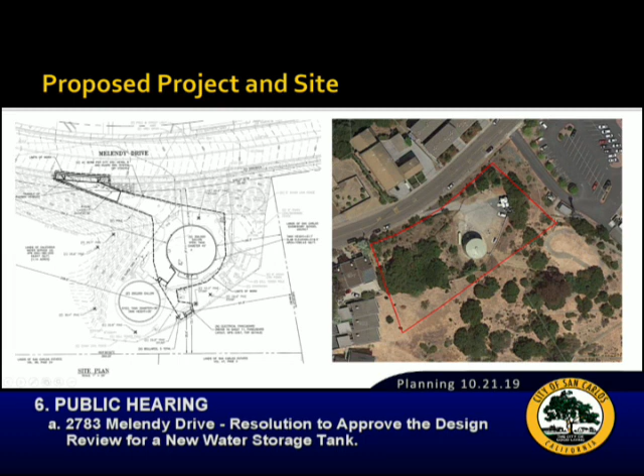They've prepared new visual simulations that reflect the revisions, and they've prepared additional visual simulations that reflect what the landscaping would look like at full maturity, which is about 25 years. The previous depicted a maximum of 12 years.

They've also upgraded the materials of the entry gate from chain link to a wrought iron gate. And lastly, the city's environmental consultant also prepared an addendum to the IS/MND to analyze the changes to the landscaping plan.

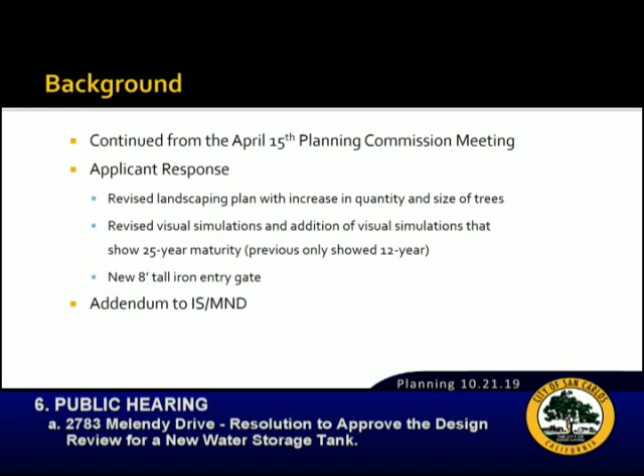This table compares the previous landscaping to the current proposal. As you can see, there's an increase of 7 shrubs and an increase of 9 trees located here and here. They've also noted that all of the proposed cedars have been increased in size from 15-gallon to 24-inch box size, so at their starting point, they'll be larger than what was previously proposed.

Next, I'm going to show the original visual simulations at 12-year landscape maturity, followed by the revised visual simulations at both 12 and 25 years maturity.

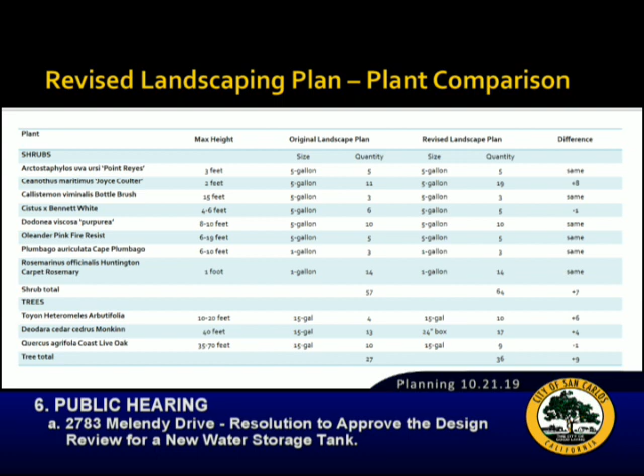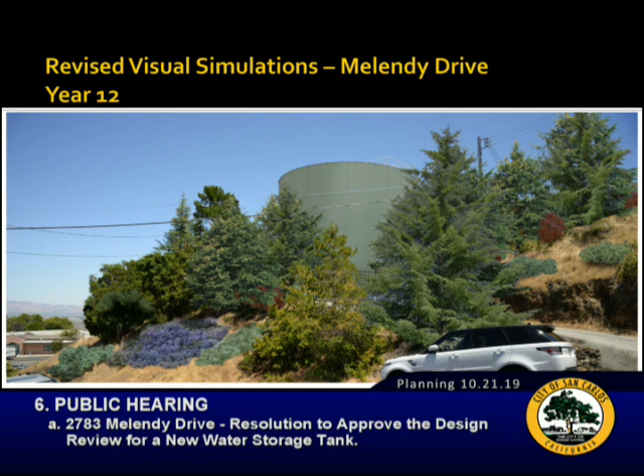This is the original visual simulation from Melendy Drive, shown at 12 years maturity. And here's the revised visual simulation. You can see the larger cedar trees are more effectively screening the tank, and you can also see a glimpse of that iron entry gate. At year 25, further screening leaves just a sliver of the tank visible.

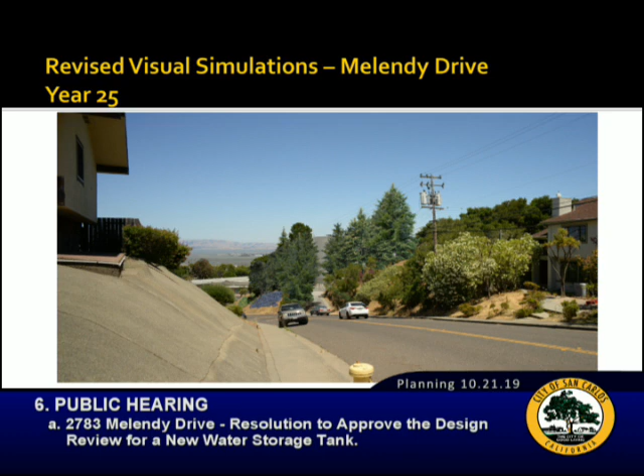This is the original visual simulation, taken further west on Melendy Drive, looking east towards the proposed tank, also at 12 years maturity. Here you see the revised landscaping at 12 years maturity, with taller cedar trees helping screen the tank. At 25 years, just a sliver of the tank is visible from the public right-of-way.

I'll summarize the environmental review process quickly. The city prepared an IS/MND and an addendum pursuant to CEQA. The project meets CEQA's mandatory findings of significance as summarized in the staff report. The addendum found that aesthetic impacts have been reduced by the revised landscaping plan, as you've seen in the previous slides.

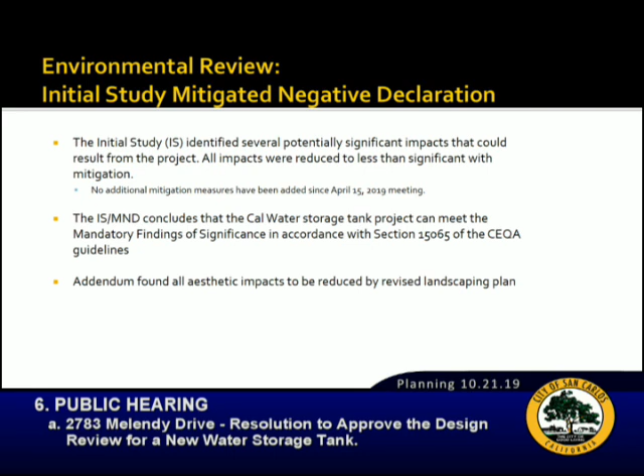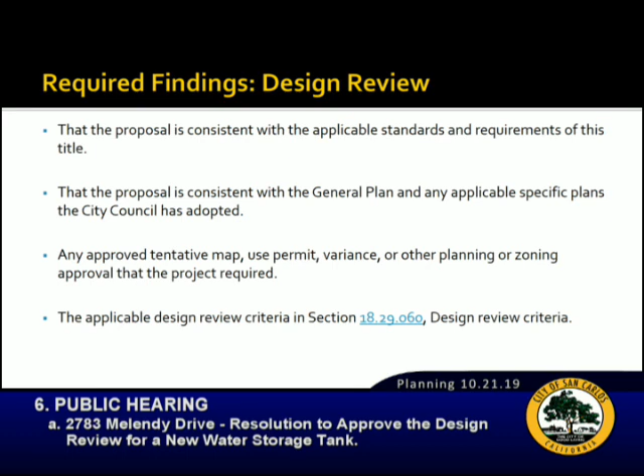This slide shows the required findings for design review. The project meets the findings as analyzed in the staff report. This slide summarizes the public outreach and comment. Staff has not received comments throughout the public outreach process, and I'll note there is no public review for a CEQA addendum.

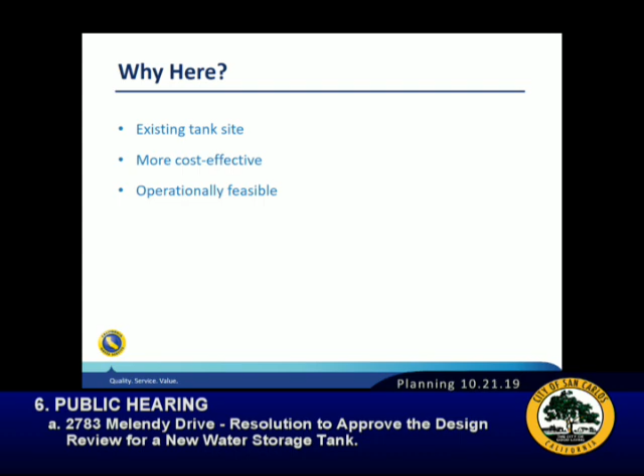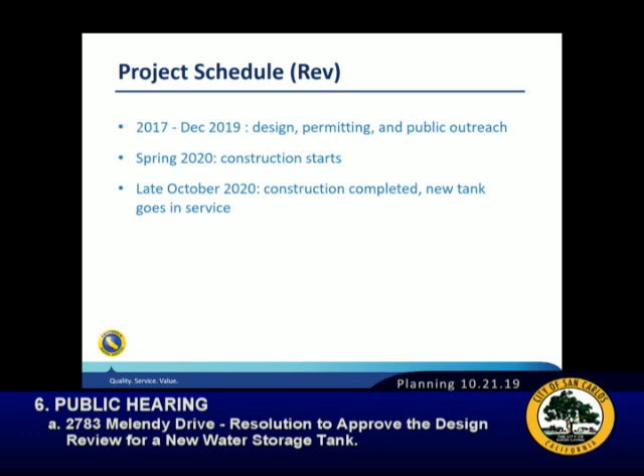We have an existing site, so it makes the most sense from an economical standpoint to build our tank here. Currently, this is the proposed schedule we have in mind. Between now and the end of the year, with approval, we'll follow through with necessary applications for a building permit. In early spring, when the ground hardens and weather is more workable, we propose to start construction, and the duration of the project would last probably about 4.5 to 5 months. The proposed tank is going to be a bolted steel tank, meaning the panels are fabricated at a factory, and when brought to the site we'll assemble them with tools, hopefully making the process a lot faster.

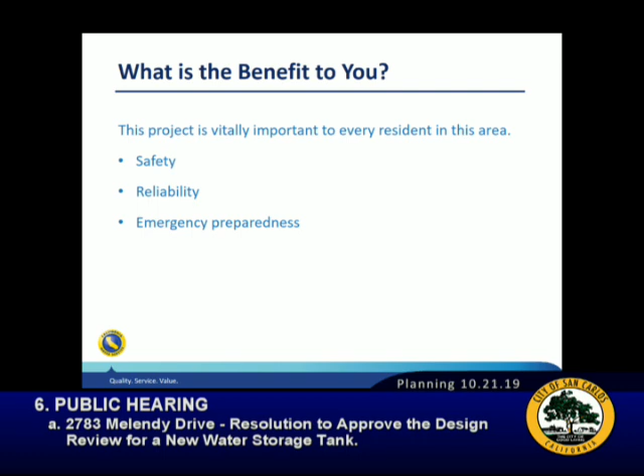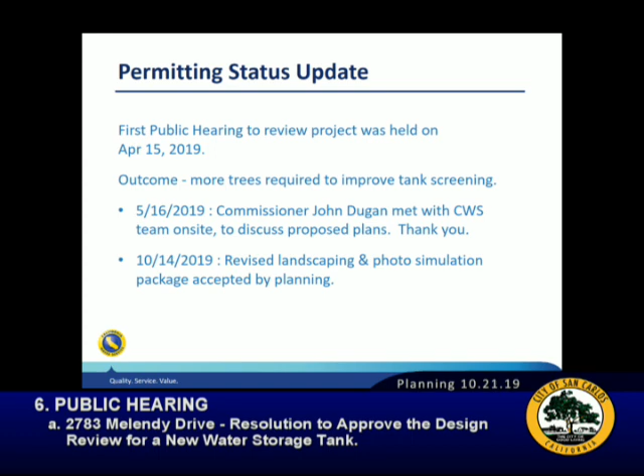As I said, it's vital for safety, reliability, and emergency preparedness. So here we are. I think Lisa covered it very well in her summary report, where we had the first meeting back in April, and right now we are before the commission asking for approval so that we can move on with this project. You've seen all of this.

Thank you very much. With me, I also have Mike Oots, our local Bayshore district manager. David Prasanna is my boss, California Water's design manager for Capital Delivery. And Stephanie O'Rourke, our consultant from Landscape Reflections.

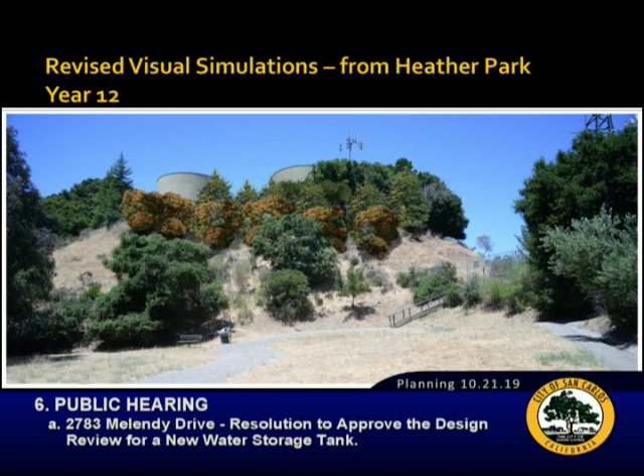Basically, the existing antenna at that location behind the existing tank, Commissioner, receives signals from, I think, 2 or 3 other locations. So anything that obstructs that signal would cost the telecommunication system. I see, so it's some kind of line of sight type system.

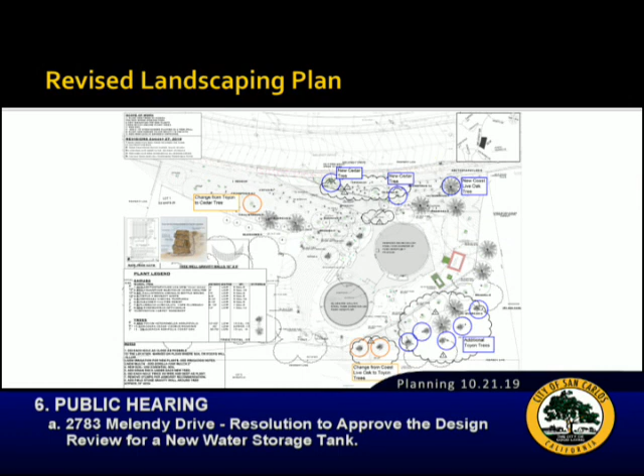You're right. Okay, so we planted trees - where's it at in this photo? I could go to the site plan to show you. Sure, that's fine. It is right here. Okay, so in that area we planted trees, but we made sure that the growth will not extend beyond the line of sight for the telecommunication tower there.

Any other questions of the applicant? Okay.

This is a public hearing, so we can hear from the public now. I don't currently have a speaker card on this project. Would anyone like to speak on this matter? If not, I'll entertain a motion to close the public hearing. I'll move to close the public hearing. I'll second that. All in favor of closing public hearing, say aye. Aye. Any nays? So the public hearing is closed.

Commissioners, we can now discuss this amongst ourselves. I believe that just looking at the new drawings about the trees, the larger cedar trees do really, in my opinion, effectively shield and cover that tank. I think it looks good.

A little frustrated that the best shielding takes 25 years. That seems like a long time.

I'll move that the Planning Commission adopt a mitigated negative declaration and mitigation monitoring and reporting program, and approve the request for design review approval for Cal Water to install a new water storage tank at 2783 Melendy Drive, San Carlos, based on the required findings and for the reasons outlined in the planning staff report.

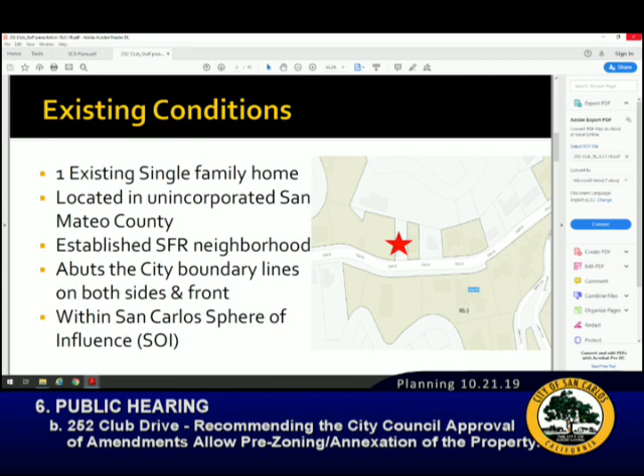And just so I understand, the taupe is San Carlos proper, incorporated? Correct. And everything else is San Mateo County? Correct. Okay, thank you. Yes.

A bit of background on the site itself. Back in March of this year, the city issued the parcel an outside sewer service agreement through our Public Works Department. This allowed the property to connect to the city's sewer system due to its own failing septic system on site, which was declared a threat to public health. There were a series of approval conditions associated with that outside sewer service agreement, including that the property could no longer be subdivided if it was annexed within the city, and that a formal pre-zoning or annexation application be submitted to the city within 5 years of the date of the agreement back in March.

Brief overview of the annexation process itself. The first step begins with the property having conversations with its jurisdictional oversight, which is the County of San Mateo, as well as LAFCO, our local Local Agency Formation Commission for San Mateo County. LAFCO is the state mandated agency responsible for any change in jurisdictional boundary lines. The property owners have done that. Both the county and LAFCO have expressed their support of the annexation.

This is my first annexation, so this is new ground for me. Do you have an overview of our sphere of influence? That's a new term for me. I know we can definitely pull that up on the web. I don't have that information with me, but based on prior experiences in San Carlos, the sphere of influence effectively runs along Club Drive, up Crestview, and then there's the Devonshire Canyon pocket. That's all within the city's established sphere of influence.

Okay, thank you. So it seems like this, at least for tax purposes, is the city's gain, the county's loss. Does the county have a posture on this? Are they generally supportive, or neutral? I'm just wondering how that works. I think the ultimate goal of established spheres of influence is for any remainder pockets in unincorporated lands to eventually be integrated into their assigned jurisdiction. So, for example, on the map here, all of the clear Google imagery still located in San Mateo County is within the city's sphere of influence, and the intent is ultimate annexation into the city.

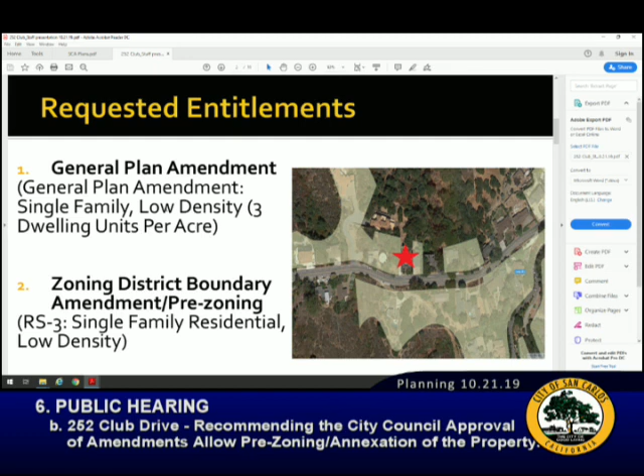Okay, that's interesting. This seems like quite a bit of public work just for one parcel. How big is the fee that we impose? The application fee that was submitted? Oh boy, do you know? And do they have to pay for the environmental reports and all that? Yes. What do we know the application fee is?

I'm just curious, I don't have the application in front of me, but it's in the range of $7,000, I would say. Okay, so it is significant. It's intended to fully recover the city's cost of reviewing it. But as Ms. Davis said, the goal really is to get those unincorporated parcels annexed into a jurisdiction, and that's LAFCO's goal, really.

Got it, yeah, just curious that it ends up being so piecemeal. Almost like if four neighbors banded together to do it at once, would that save cost? Yes. And then there's also that tax sharing agreement that's typically negotiated by the county manager and the city manager to ensure that the county kind of remains whole, and then the city benefits kind of in future years.

I see, and that's a little more critical when we're talking about commercial annexations than a single family house. Yeah, even though single-family house property tax can be significant too. But maybe just to follow up on that, the time of any significant reappraisal is on change of ownership. So for the foreseeable future, as long as the applicants continue to own the current home, the annexation doesn't trigger any change in appraisals. Is that the way we understood it? Yeah, thank you.

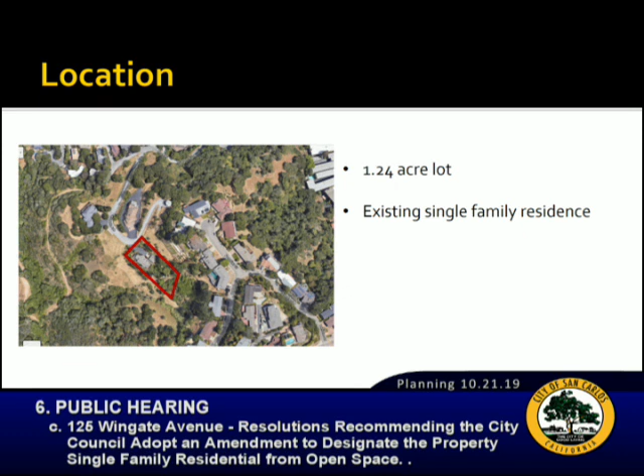The item is consideration of a general plan and zoning map amendment to change the site from an open space land use designation to single-family residential. The subject site is a little over 1.2 acres in area and is accessed through the County of San Mateo via Winding Way and Wingate Avenue. The site is improved with a single-family residence that was constructed in 1997.

The previous zoning map, dating back to 1990, designated the site as single-family residential, although the previous general plan land use map designated the site as open space. Upon receipt of an application in 1997 from the current property owner, the planning department conducted research and determined that the lot was legally created, and reviewed the zoning map and determined that it was single-family residential, and as such granted approval for a new residence.

That residence was constructed on the site and a final certificate of occupancy was issued in 1998. When the 2009 general plan update was conducted, the old general plan map was relied on as being accurate, and that open space land use designation was carried forward. Subsequently, in the 2011 zoning map, the goal was to get consistency with the newly adopted general plan map, and so unfortunately, that open space designation of the general plan was also carried forward with the new 2011 zoning map. It resulted in the site being designated as open space in both the general plan as well as the zoning map.

So the request from the property owner is to amend the general plan and zoning map to designate the site as single-family residential from the current open space designation. The property owner does not have any proposed changes to the site at this time.

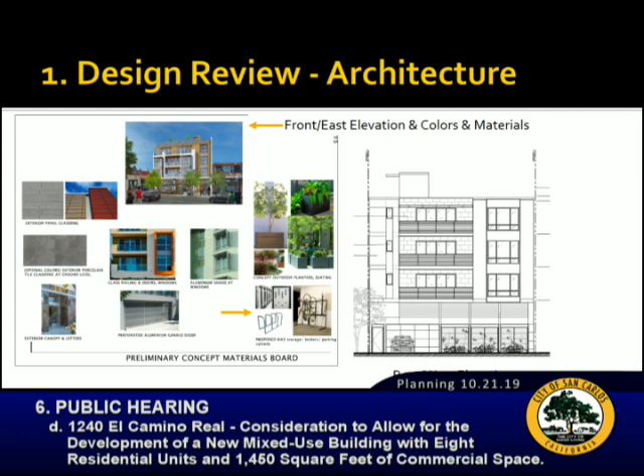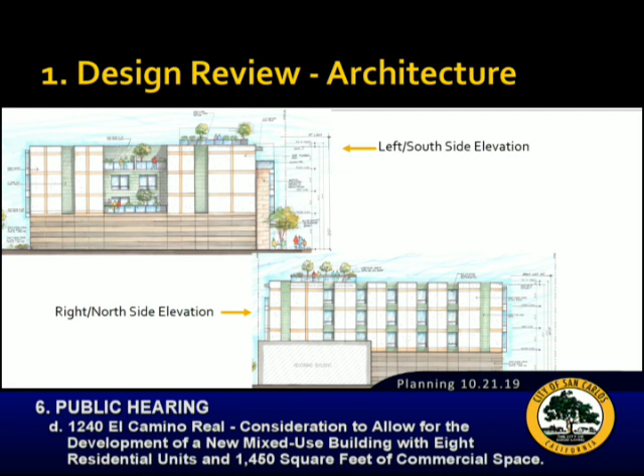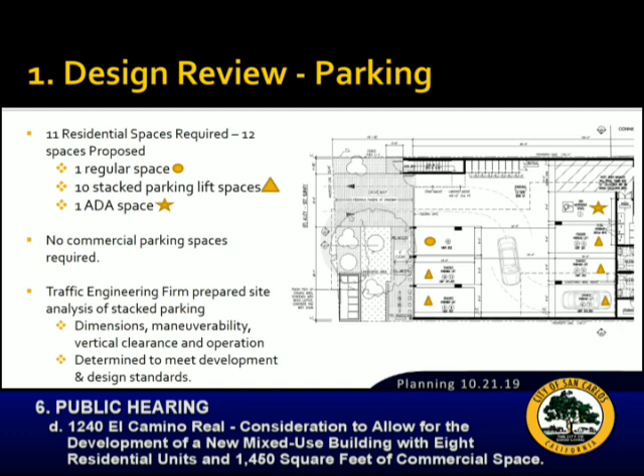In terms of the parking proposed for this building, all parking is to be located on site, with access from the rear yard public alleyway to a covered parking garage. The project requires a total of 11 parking spaces, while 12 are proposed. Of those 12 spaces, 10 are proposed as 2-tiered stacked parking lifts. As required by the municipal code, a site analysis of the proposed parking lifts was prepared by an outside professional traffic engineering firm to evaluate the proposed parking systems' design dimensions, vertical clearances, maneuverability of different types of vehicles, as well as the system operation of the program itself.

Was that professional hired by the city or by the applicant? That was hired and paid for by the applicant. Okay.

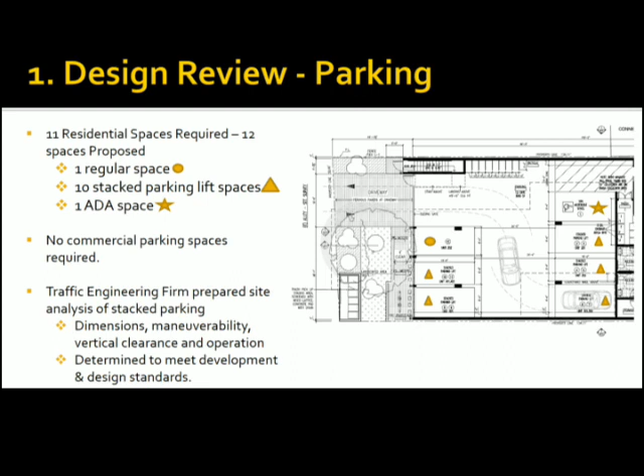This analysis concluded that the proposed stacked parking system did meet the city's adopted development and design standards in its municipal code related to stacked parking systems, which are allowed.

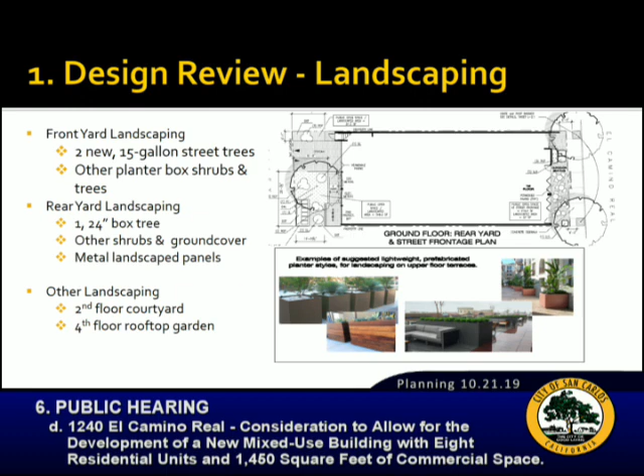See, my copy is not having the master numbering system. Let me pull it up on the packet. It's L2 sheet. Do you have a numbering on that? I don't see packet pages here. Oh, it's behind my staple. Oh, yeah, maybe if you can see sheet L2.

I see, so it's just the center part of the building, and it opens facing which direction? Access to the rooftop patio faces the northern side of the building. Okay, so if you're on that deck, you can look out north, but otherwise you're looking at walls on the other 3 sides? Is that right? No, you could look out on all 4 sides of that rooftop patio, but access is on this side here.

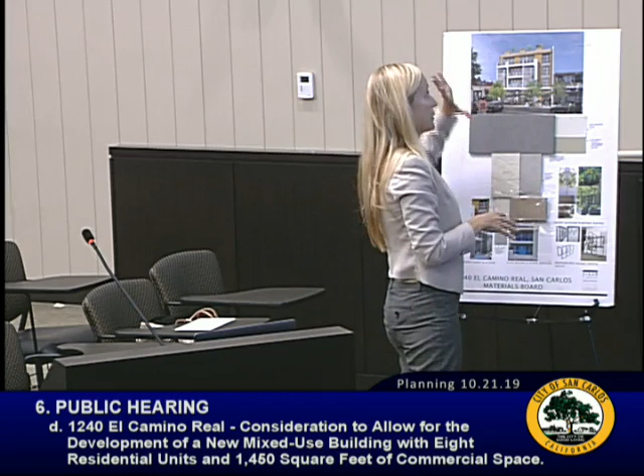Okay, and the rooftop patio is that square box that you just described. Yeah, the rear of that is still roof that would accommodate future mechanical equipment and or solar panels. I see, yeah, you would have a view out El Camino. You may be able to see the bay.

Sorry, yeah, I was trying to get it on the right page there. Perfect, but I can't see, I can't read that. Oh yeah, I can't read that either, but okay. Oh yeah, that's a good view. Thank you, David, okay, I got it.

Appreciate it. I guess my question is, is that setback enough to alleviate the potential privacy concerns for adjacent properties, even though right now it doesn't look like there would be any issue. But how many feet setback is the rooftop patio?

Yeah, let me open up the plans. Hard to get a feeling for - I mean, you don't want people hanging over the neighboring property, but this looks pretty. I guess if it's hanging over anything, it's mostly El Camino, I think. Or the sides too, I guess. Yeah, you're right, it looks like it's inset on the side.

It's 3 feet in from the northern elevation, and it is approximately 12 feet in from the southern side or the left side of the building. In terms of the El Camino Real elevation, it is set back approximately - well, from the property line it's set back about 12 feet, but from the building itself, about 4 feet. And from the rear of the building, the one that faces Laurel Street, you're looking at about over 65 feet.

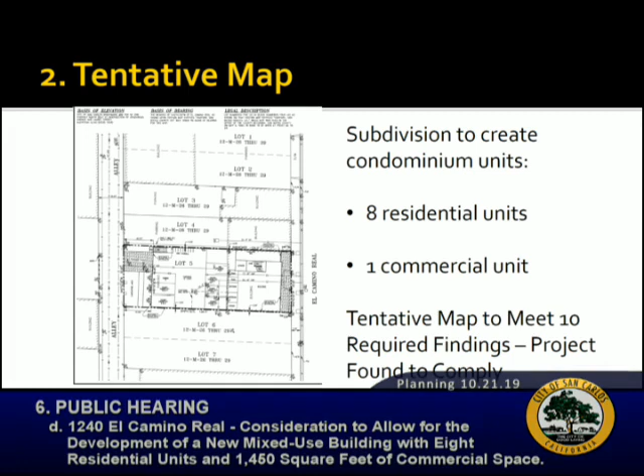So moving into the second requested entitlement, which is a tentative map to allow for a subdivision to create condominium units. Specifically, the request would be to create 8 condominium units and 1 commercial condominium unit. A tentative map, according to the municipal code, is required to meet 10 required findings. And as detailed in the staff report, the project is found to comply with those 10 required findings.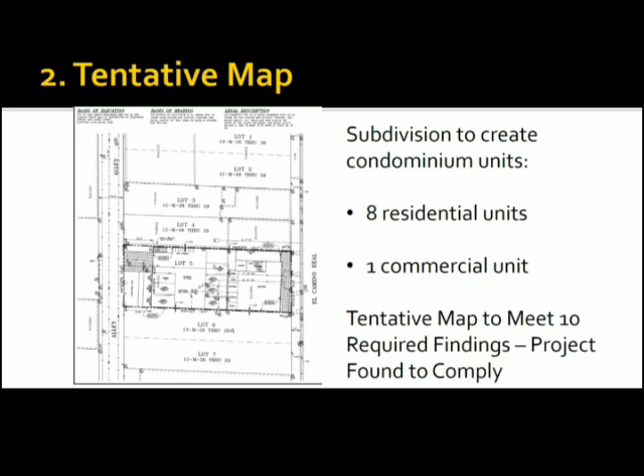The third entitlement is the request for approval of a below market rate housing plan. Should the commission approve the project, a BMR housing agreement between the city and the property would be required. The ordinance does require 15% of ownership units to be set aside at affordable household income limits. The applicant's below market rate housing plan proposes to provide one bedroom unit affordable to a moderate income household, as well as pay an established in-lieu housing fee. This plan has been reviewed and conditionally approved by the city's below market rate housing manager.

And when we say 15%, is that on a square footage basis? Do you have that measurement? 15% of the total amount of units proposed. Okay, and do you have that ratio on this 1-bedroom unit versus the total occupiable square footage? Square footage wise, yes, of the 1-bedroom? Yes, 1-bedroom versus, not counting the garage, the occupiable square feet.

Related to the whole building, I'd have to run a quick calculation. I can tell you what the square footage of the 1-bedroom unit is, if that helps. 834 square feet. And what's the total square footage? Here, let me look at the plans.

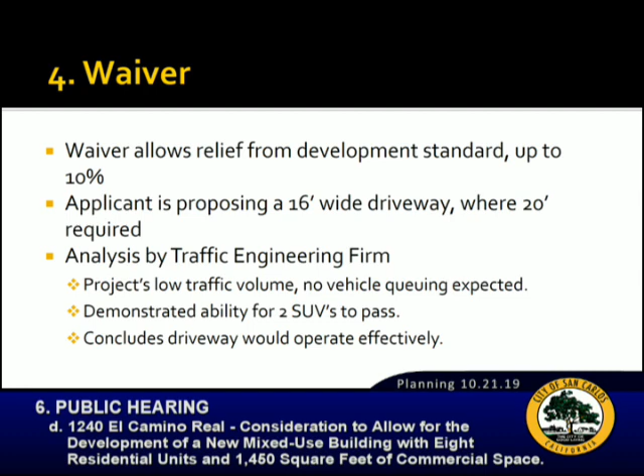Just to check the math on that — can you link the point about the waiver allowing relief up to 10%, when we're actually proposing a 20% reduction? In other words, 4 feet off of 20 is a 20% reduction. I'm just trying to connect the first bullet point and the second bullet point. I'm sorry, I believe the 10% reference is incorrect. That's okay.

In terms of public outreach, the project applicant did initially conduct outreach when the project was initially submitted to the city, back in July of 2018. For historical perspective, there were a series of renditions and revisions to help address building design concerns from the original submittal, with more segmentation and articulation added into the building.

That public outreach the applicant submitted was to all property owners and residents within 300 feet of the site. They were unable to get one meeting where everybody could attend, so instead the project property owner met with each of the interested parties individually. The conclusions submitted to the city were that all of those responses were positive in terms of the design and proposal of the building itself.

The city did propose standard public noticing through mailings for tonight's meeting and publication in the newspaper, and to date, no comments have been received.

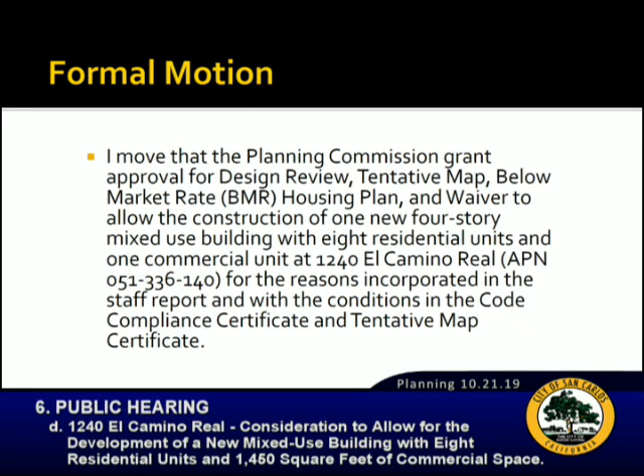I had one question about the lift for the cars. Are there any other developments in San Carlos that use a similar kind of lift? I think there has been. Lisa, do you know any off the top of your head? We have a few projects in San Carlos that have recently been approved with parking lifts. I don't know the exact design of this one, but 817 Walnut was approved, and there are at least 3 others, though I don't have those addresses.

As a commission, we've expressed general concern over these parking lifts and how they'll actually work. I think we even asked staff to let us see them in action, or facilitate some kind of field trip, because we all feel rather ignorant on this subject. Every time we encounter these, it raises concerns - how long will they run? What if they don't keep running?

There are 8 units being approved, and I see 1, 2, 3, 4, 5, and 6 spaces, and 5 of them have lifts. So does that mean, like, my neighbor and I each get a space with a lift, so that's 2 spaces? But how does this work with neighbors? I don't understand this - does my neighbor get the upper part of the lift on Tuesdays? How does this actually work?

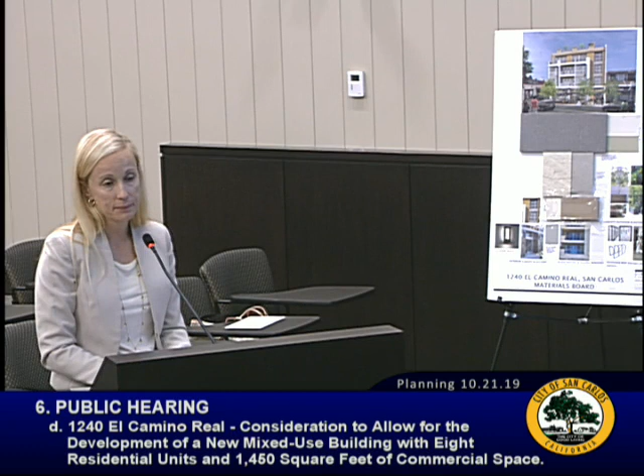That may vary from project to project too, depending on the nature of the system. We're basically calling these double spaces - what is the obligation that they're maintained for, 100 years? They're going to break eventually. How does that happen? Are they deeded in a way that the property has to maintain them, or someone's lost their property right to the upper one? I'll be interested in hearing from the applicant on this. Has staff done any further thinking on parking lifts in general, or are we still just thinking of them as a perfectly valid twofer?

Yeah, I think staff is still supporting the concept of parking lifts, but I'll remind the planning manager that we owe you a presentation. Okay, thank you, I appreciate that.

Yes, okay. I also have an answer to your question on affordable housing - I was able to look that up. The term for sale is 45 years, and the term for rental is 55 years.

I had one additional question about the bikes, looking at the poster board. There's short-term and long-term bike parking. Are both of these covered, or is the short-term parking outside for people that might want to go to the commercial space? Can you clarify that?

All the bicycle parking proposed for this project is located inside the parking garage, combined. It's a hanging rack, vertical. So if I'm coming to the commercial establishment out on El Camino and somehow brought a bicycle, I'd need to know that I could park it and where.

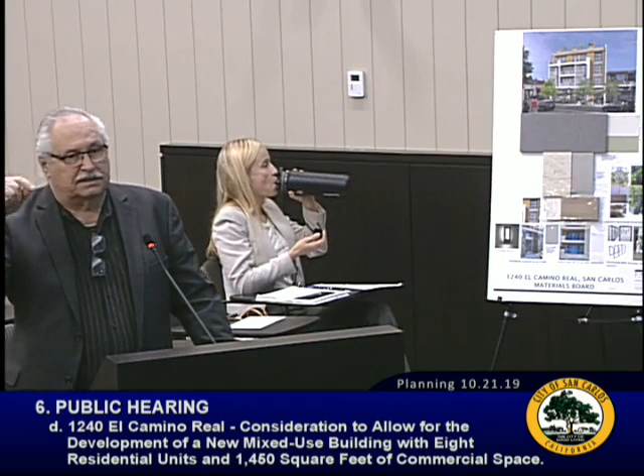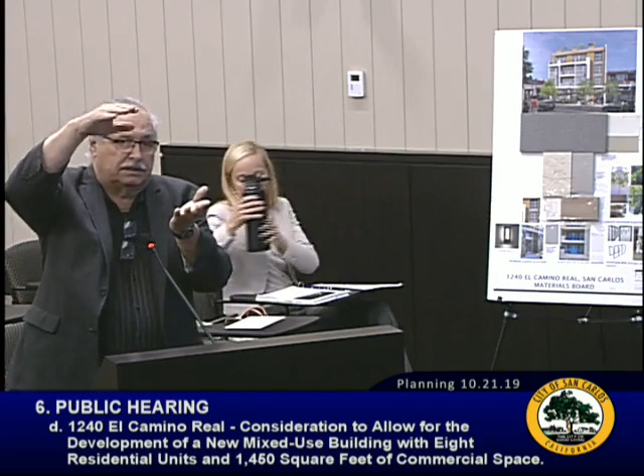Let me answer your question regarding the park lifts. With park lifts, you don't have to move the bottom car if your car is at the top. You don't have to call your neighbor and say come down, take your car out so I can move mine. These are fully automatic cars. If you have a 2-high, you can also have a 3-high, with 2 cars parked under each other, and there's also a space big enough for a car underground.

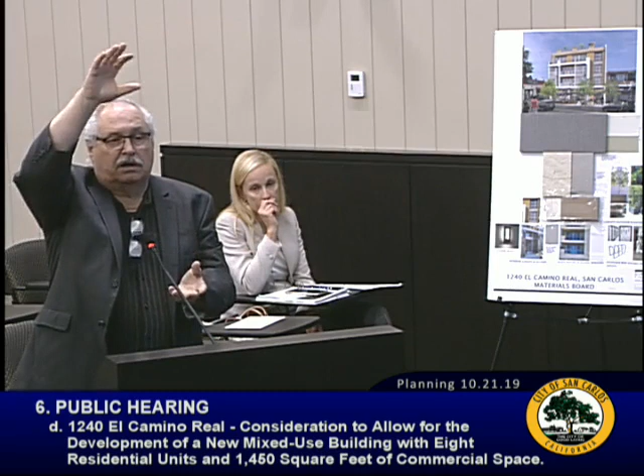So there's a pit cast into the floor. If your car is at the top, both cars will come down—one below grade and the other at grade—and it pulls out.

We have been working for the past almost 10 years with Klaus, the biggest manufacturer of park lifts, though there are many other companies. They're all over California—there are tens of thousands, if not hundreds of thousands, of park lift projects in California. Our firm does primarily multi-unit housing and mixed-use buildings like this all over.

We have projects in San Carlos—we've done a project there. We have projects in Millbrae, further up in Berkeley, and other places. All of our projects have park lifts.

It is impossible, given the size of the lots and how tight it is in urban spaces, and given that we have to provide more units so we can at least afford to have some affordable units, the mechanical parking is almost a requirement.

There are even more sophisticated products now where it's like a Rubik's Cube—the cars go this way and then one drops. We have a project in San Bruno where 100% of the parking for residents is 3-high, which means the pit is even deeper.

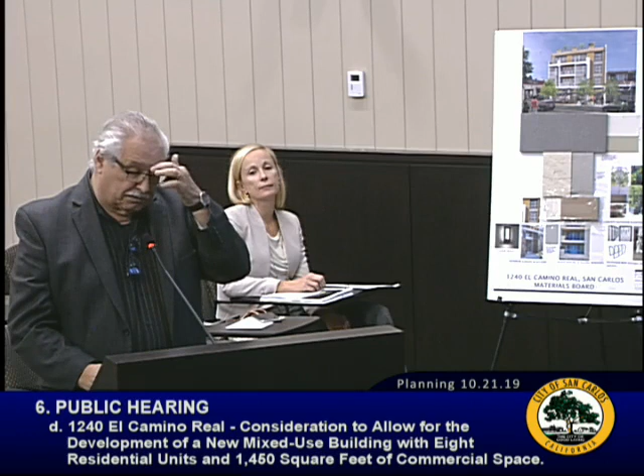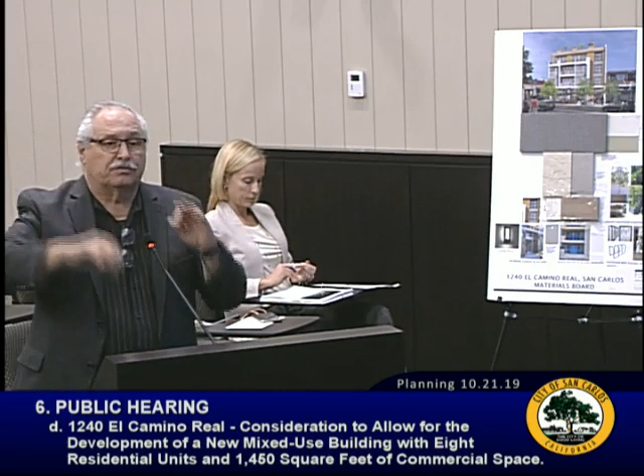I had the same comment that you made in the city of San Bruno, and we invited the entire planning commission to join us. I called the representative from Klaus, and they took us to 2 buildings in Berkeley that had both 3-high and 2-high systems, and they watched it operate.

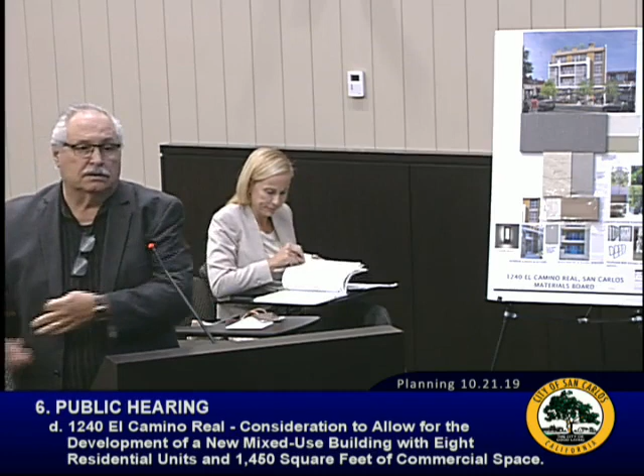It is extremely safe. You have your card, like a card to get into an elevator. You push it in, you push the button, it knows, and it brings your car down. You go in, you get out, and that's it. There's no need to bother other neighbors. They were truly convinced that it works.

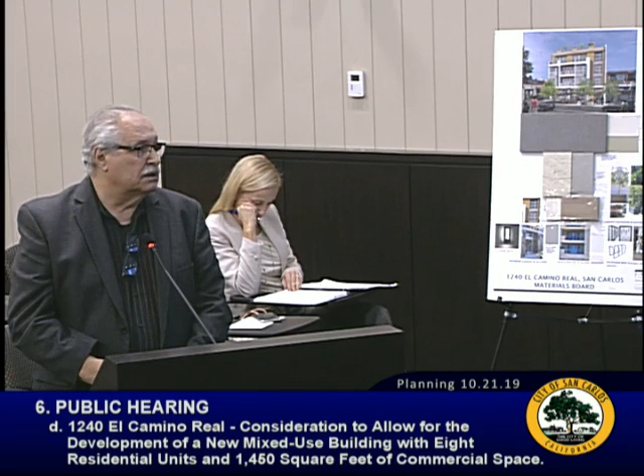We did this very special tour, and I will offer myself—if the planning department needs a presentation and any of you would like—I will be happy to arrange a tour to one of the buildings that Klaus has and show you how it works. Yeah, I appreciate that, certainly.

So young children—how is that safety hazard resolved with these?

The pit is never really exposed. When the car is down, there is a metal plate. In fact, that's all you see. You cannot fall into the pit. It goes extremely slowly, it doesn't just go, it moves very slightly.

There are some products that actually have guards, but you'd have to open and close them. That can be done, but the record has been very safe.

To the best of my knowledge, I'm not... I appreciate that, I'm not a stakeholder honestly, owner either. I think this is the third project we've looked at, and I appreciate your presentation of it.

That is helpful for me to understand it. I have a building under construction in San Carlos that has a couple of them. But the best thing to do is actually to see a whole array of what's available from these companies. There's also a lot of competition. Yeah, I definitely want to see these in the field - I have not bumped into these in the wild yet, so that would be useful.

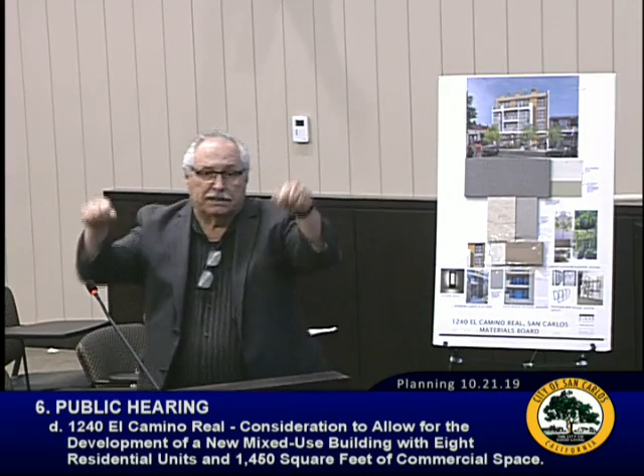We have a three-level expression of the building. It's set back, with a background building and a forward building that's a little smaller. We also have a continuous aluminum channel that goes clear across the site where we can put letters for signage, so it's not people slapping a sign on the glass or taping it. We have a signage plan, and the whole building, every element, is designed that way.

We pride ourselves on our work. Our client likes good finishes, and that's what we like to provide for San Carlos. That's it, because Stephanie did a great job. I can't improve on that.

Maybe a couple other things to follow up on. Guest parking—what provisions are within the plan for overnight guests if two or three units have a visitor? Where, what's the intention? We do not have enough space to provide guest parking given the size of the lot, so there is no guest parking. I'd refer that to planning, but I would assume so, yeah.

My observation was that of the grade level parking, excluding the ADA slot, there are five that are stacked and one is apparently not. Is that available for a stacked lift, and could that accommodate a guest?

I don't know how stacked lifts would work for guests. Personally, we have never provided them for guests—we always provide them for residents. We have provided stacked parking for people who work in commercial spaces. If it's a bookstore, the cashier could be given a card or something like that. So I don't really have an answer to your question that way.

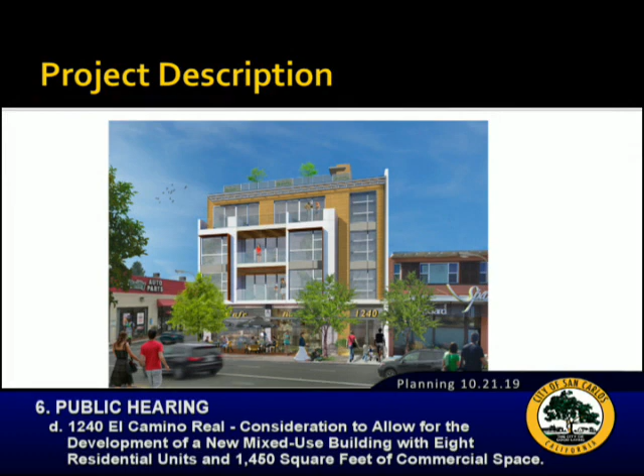You'd have to look at the plan. It's varied, but El Camino specifically is considered transit-oriented, and as far as I understand, our code has always allowed for tall buildings, 4 stories or so. I'm no expert on it, but I think there will be more unless, as a community, we want to revisit our zoning in that area.

Again, it's going to create an additional traffic problem. I can't tell you how many nights I walk out of my office and my driveway's blocked because somebody either didn't see it, didn't care, or parked in a hurry. I've called the police, especially in the last 2 years, probably 24 times, because I physically can't get out of my driveway. This is just going to make things worse.

I looked at this and thought, holy smokes, I can't believe this is what the city's going to. But if it is, I want to remain friends with him, because I'm going to sell him my building at some point down the road and let him add on to it. I'd like you guys to really take that into consideration in this project.

Thank you, appreciate that. Can I say one word? Sure.

El Camino Real is the biggest boulevard in Northern California. It goes through God knows how many communities. It is the best location for public transportation. It has a train station in San Carlos, it has bus service, it has wide, ample lanes. If there's one place where you can put a 4-story building, it's El Camino Real. You can't do that up in the hills where it's single-family homes, and you can't do that in the industrial area where the soil is polluted. But you can do it on El Camino.